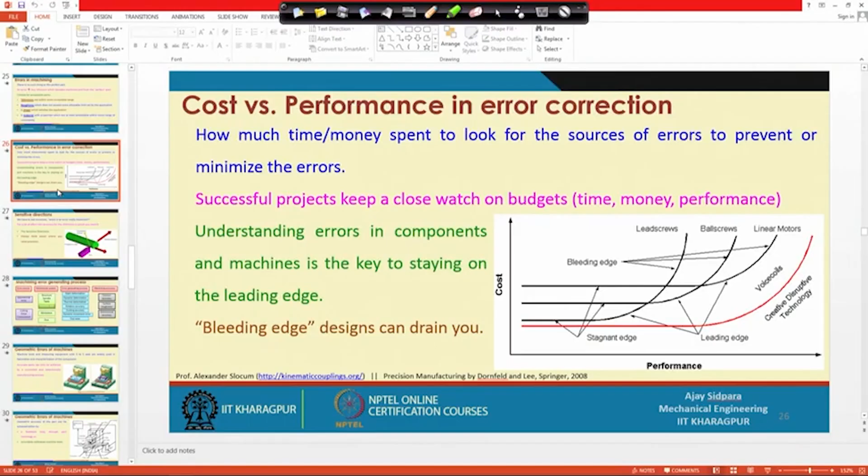Cost versus performance was one of the criteria. Here we have seen that you have to always stay at this leading edge, so that you can get more amount of performance compared to the cost and time you are spending to get the system more ready.

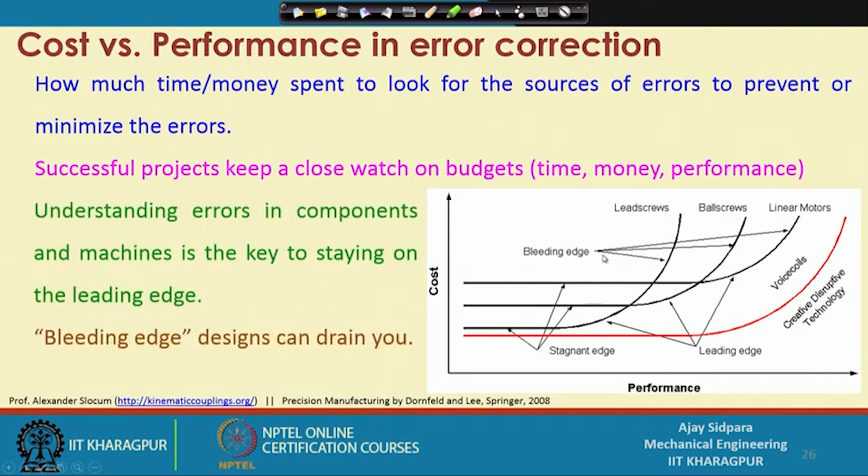Then we have seen that we have to focus not only on cost and time, but also finalize which direction or error is important to remove or minimize. There are many errors, but some can be neglected since they may not play an important role during or after fabrication. So you pay more attention to the sensitive direction where your machine stiffness should be very high.

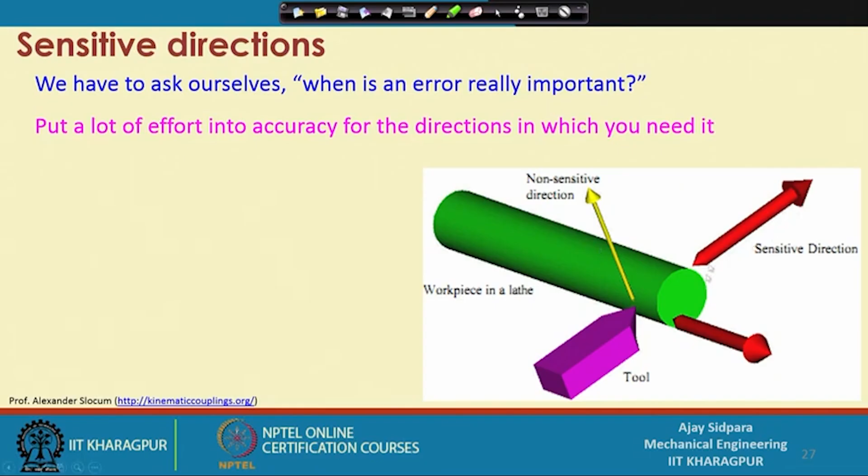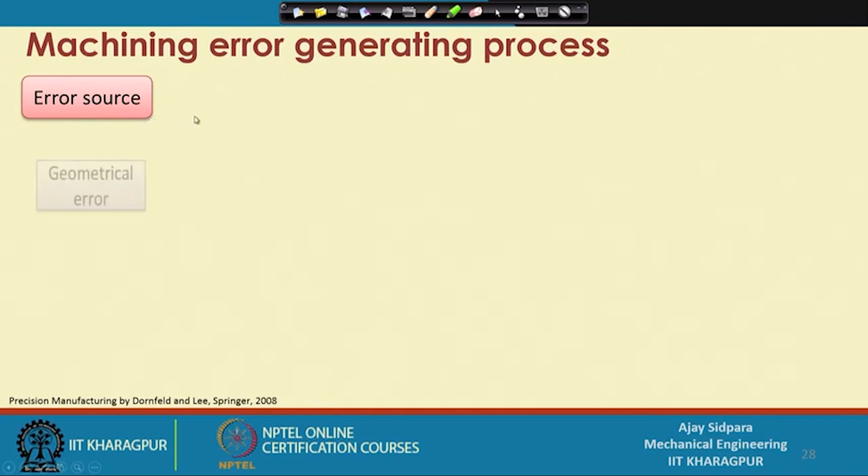Now, machining error generating processes. First we have to identify the sources of error. Mostly the sources of error are geometrical errors, cutting process error, drive error, and environmental error. What is the geometric error?

Geometric errors are mostly related to the structure of the machine, related to the machine tool. Cutting error occurs when you operate a machine, at that time you end up with some type of cutting operation, so your machine is in dynamic condition. There are forces, acceleration, deceleration of the cutting tool in different motions, and high heat generation. Those things create problems in error.

Then there are drives. Drives means the table and cutting tool which move up and down, moving the slides and other things. Environment is mostly related to temperature variation, humidity variation, and climate conditions. So these are the different sources of errors.

Now second is the mechanical system, how these errors are affected in this direction. Geometrical errors are mostly related to the machine, the machine tool. What does the machine tool consist of?

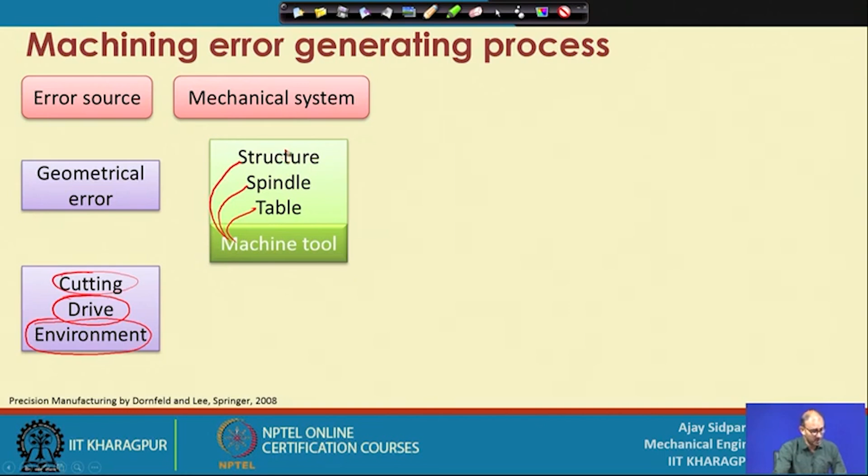Machine tool consists of the table, spindle, and the structure. Geometrical errors are mostly connected with these particular things, because the table and structure are always a stationary structure. So if you are not getting orthogonality between the x, y and z direction, then you end up with some type of problem.

So these are what is required in this particular direction - all things should be perpendicular to each other. If those things are not there, there are some other problems, and you end up with some geometrical errors. What are the other components here?

Another one is the workpiece, because we know that the machine tool is a standalone component, but there are two other things we are adding depending on the selection of machining operations. One is the workpiece, which we add because we want to shape this particular thing. And why are we shaping that?

We need a tool also, because the tool and workpiece are both selection based, depending on the specification of your machine tool, and these things are already built into the machine tool. So cutting tool error, cutting error, drive error, and environmental error are directly connected with this, and may be connected with this also.

So, these are the error sources. Where this error will occur, those things are these, because in the mechanical system these are the only things which are standard available. Now, if you add some camera or microscope or force sensor, those are supplementary things, but they cannot be considered during this particular error generation mechanism.

Then the error generating processes, what are these things? This is the static deformation, because in static deformation, if you are not doing any machining operation, because of the aging of the machine tool, there is static deformation in the structure and static deformation in the table also. In that way you end up with some type of problems.

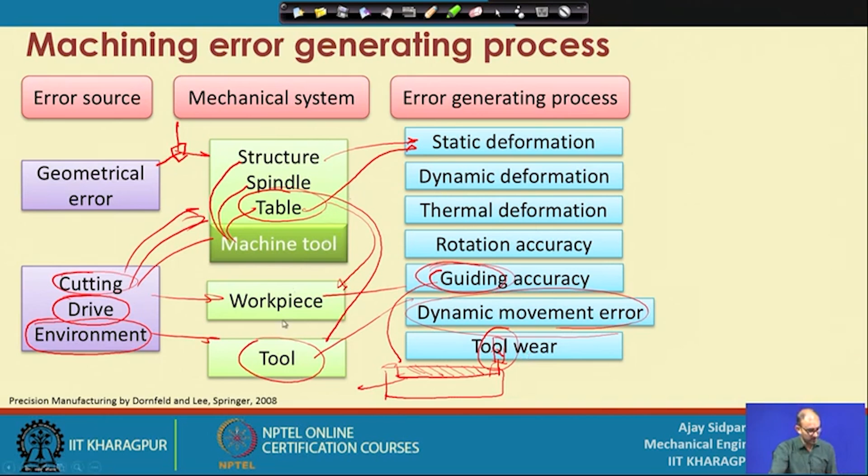So, in that way these are the different error generating processes, and what you are finally getting, what is our objective, is that we should get very high contour accuracy. Contour accuracy means, suppose you want a circular or cylindrical component - it should be a cylinder only, not some type of cone in the positive or negative way. That is called contour accuracy.

Surface roughness is important because we have different criteria for acceptance of the component, since we cannot produce a perfect part. Contour shape was one criterion, surface roughness was another, and dimensional accuracy, that is how much tolerance is within the part.

Here we are not talking about material properties, because that is another criteria not connected with the machine tool. So what we have to do first is find out what is the problem in our part.

Suppose surface roughness is not exactly meeting the requirement, but the contour is okay and dimensions are also acceptable. Then if you are getting poor surface roughness, you have to go back and find which parameter is affecting the surface roughness.

Suppose your tool is worn and you continue that machining operation, there is a chance that tool wear is one of the things creating a rough surface. Once it is identified as tool wear, go back again and find which mechanical system is creating the tool wear.

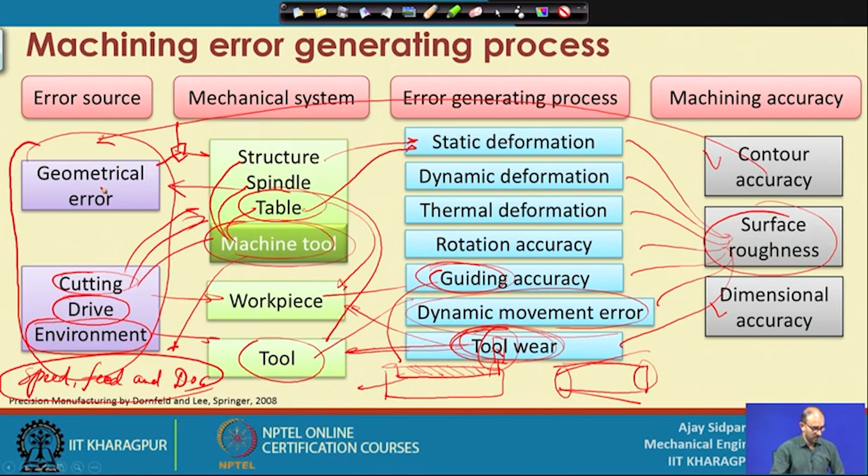An accurate part can only be achieved by a controlled or deterministic manufacturing process. Now what does it mean? The first thing is control. How can you control your thing?

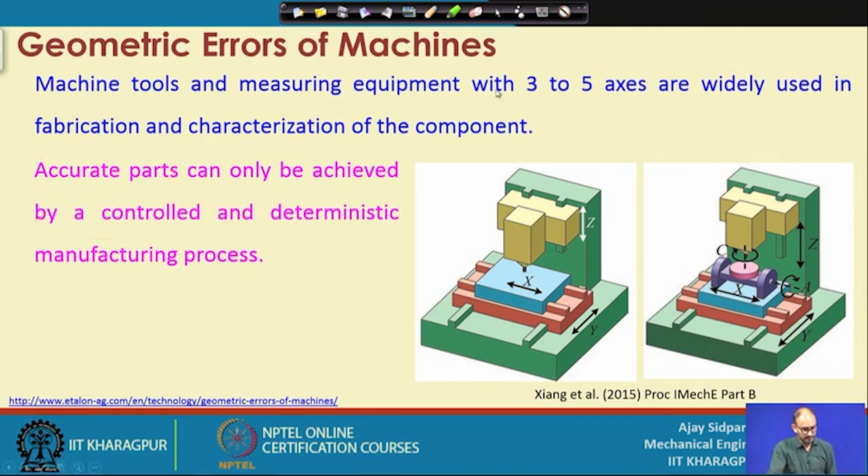Depending on that, different construction parts are also available. This is called the construction loop or structural loop through which you get this information. So if you have a very good feedback control, you can get a geometrically correct component, or alternatively you can get it through a calibrated machine tool.

Calibrated means, as we saw in the earlier slide, if you machine a component with a fixed parameter and continue with that fixed parameter, every time you get the same component, that means your machine is calibrated. You do not have much deviation that would reject the part, even if all input conditions remain constant.

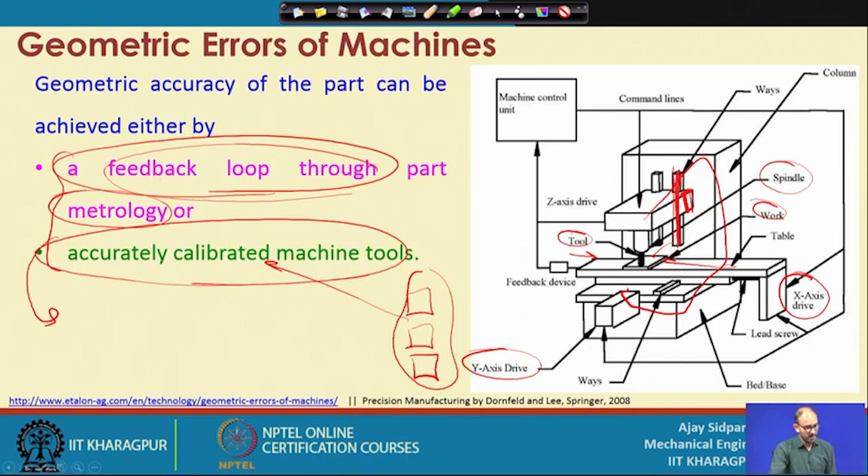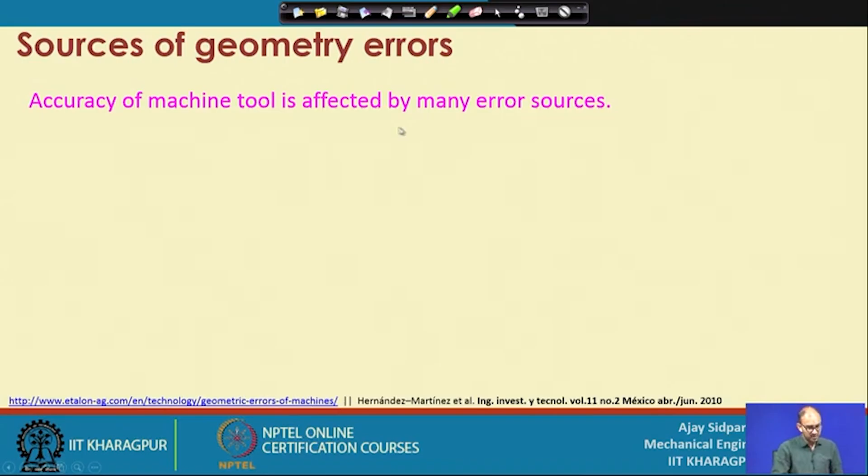Now, sources of geometry error. Let us first take the geometric error, meaning the sources of error in the X, Y, Z direction, or the movement of the axis only, not going into the tool side or workpiece side. So the accuracy of the machine tool is affected by many sources. If you see this particular thing, you can understand that this should be exactly a straight line.

If this is the straight line, this should be perpendicular to this part, and this should be perpendicular to this one, and this should be perpendicular to this one. So this should be the actual condition, but what happens is you have external vibration, distortion and foundation problems. So your base or foundation is slightly skewed, and because of this deformation of the foundation, even if all three of these are right angle to each other, this whole thing will move in the other direction, even if it contains a 90-degree part. So this is also 90 degree, this is 90 degree, this is 90 degree, but this particular line has moved from this to this at a particular angle. So the whole thing is distorted.

Now there is thermal fluctuation. If this particular thing is perfectly correct, this is a straight line, there is no problem in that, so the whole thing is correct. Now thermal deformation occurs here, so this will bend a little bit, and this whole thing will also expand depending on the temperature effect. So now this is completely distorted, and this is creating a problem. So now these things are not at right angles to each other, and that will create a problem.

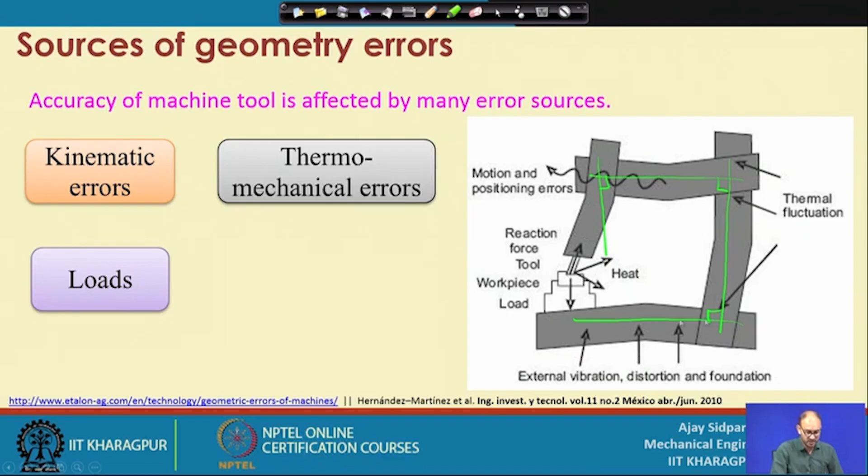Loads means there is also a stationary load. Another thing is that when you do machining, there is also a force, and that is also considered a dynamic load, which will create a problem in the spindle system as well as in other structural components. This load is the stationary load, and the dynamic force we are talking about is the reaction force or other forces that occur during machining operation. That means when your machine is in running condition, you will encounter these dynamic forces. So these are the different forces which create a problem in the geometry of the machine.

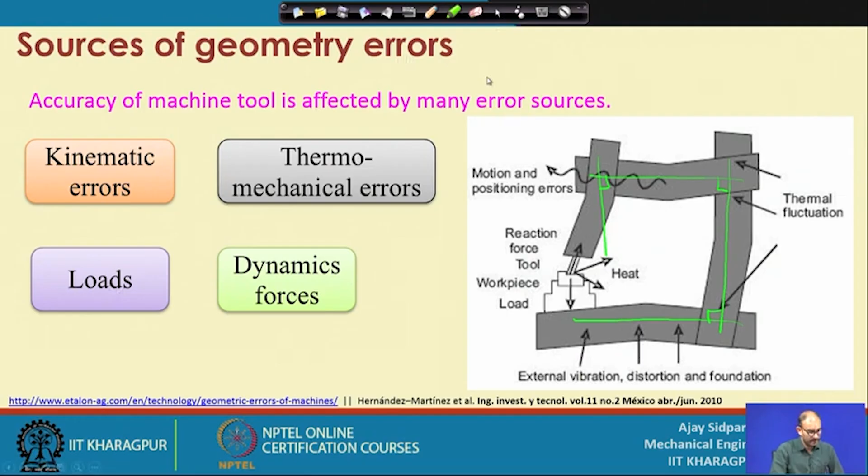So first is the kinematic error. What is kinematic error? It is due to imperfect geometry, alignment and dimension of the machine component. Suppose you have a complete structure of the machine, and if its geometry is imperfect, that means whatever dimension you are creating, suppose this cantilever beam has a square section or a circular section or any other shape, then its dimension should be perfectly within the allowance or tolerance limit.

Alignment is also a problem, because everything should be perfectly in alignment, so that your spindle axis is always in a vertical straight direction, not anything other than straight. And the dimension of the machine component directly depends on this alignment, because if the dimension is not exact, you will not get the assembly correct. And if there is an alignment problem, then you will not get the perfect combination of the different components.

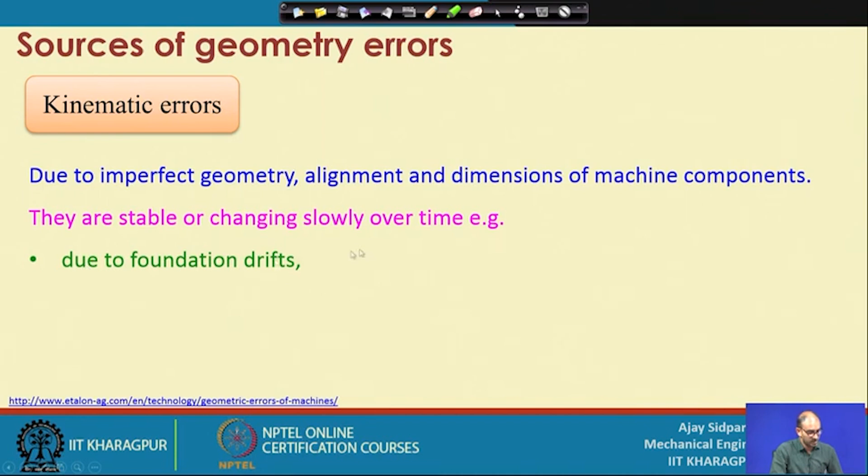So, they are stable or changing slowly over time. Whatever these kinematic errors are, sometimes initially you are not getting those things, but they are stable also. As time passes, you are doing machining with different parameter settings, sometimes the forces are also very high. Over time this will start playing an important role, because of the foundation drift.

What is the drift? Drift is a deviation due to age. That means whatever deformation occurs due to age, or we can say deformation with respect to time. If your machine is very old, then you will get a foundation drift.

Foundation drift means the foundation is never in motion, it is always a stationary part. But because of the many things you are doing on the foundation, machining, mounting a very heavy vise or heavy workpiece on top, then removing it and mounting again, those things play an important role in the study of the current status of the foundation.

And wear or material aging, because all the materials used in the construction of the machine tool may get wear because of aging. Aging means with respect to time you are getting these materials into a very unstable condition. So you may get some type of kinematic errors after a long time, and also by collision, because when you do machining at a very high rate.

Suppose your cutting tool is here and your workpiece is here at this location, and you want to remove this whole thing. You start with the cutting tool here, and then right now you are moving from here to here, there is no machining happening. So it is called free machining.

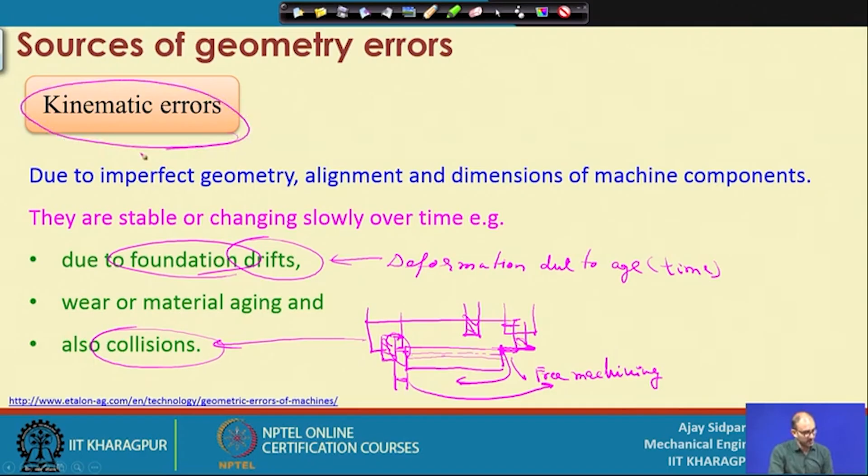Then thermomechanical errors. What are thermomechanical errors? The internal and external heat sources in the machine may lead to thermomechanical deformation of machine components, and then it leads to kinematic error, because we have seen the full construction here, in x, y and z direction. This is the workpiece, this is the tool.

This is the construction. Now because of this temperature difference, what will happen? This particular part has some coefficient alpha here, this one has one thermal coefficient alpha, this one also, and every component has a different thermal coefficient of thermal expansion.

If the materials are different, then all materials have different coefficients of thermal expansion, and depending on the temperature variation, your part will expand or contract differently. So at the end, at certain locations it will create a problem, because it may bend to the right side or the left side, and then your total geometric stability will be reduced.

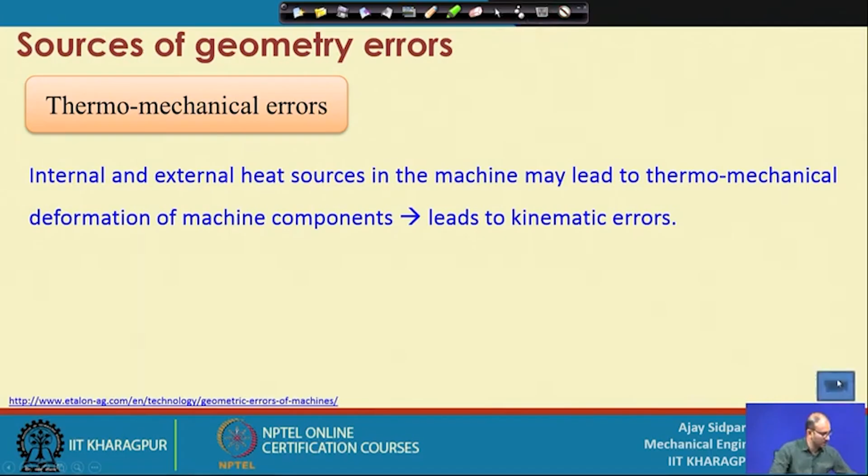Now let us see a video here, showing how this particular thing works.

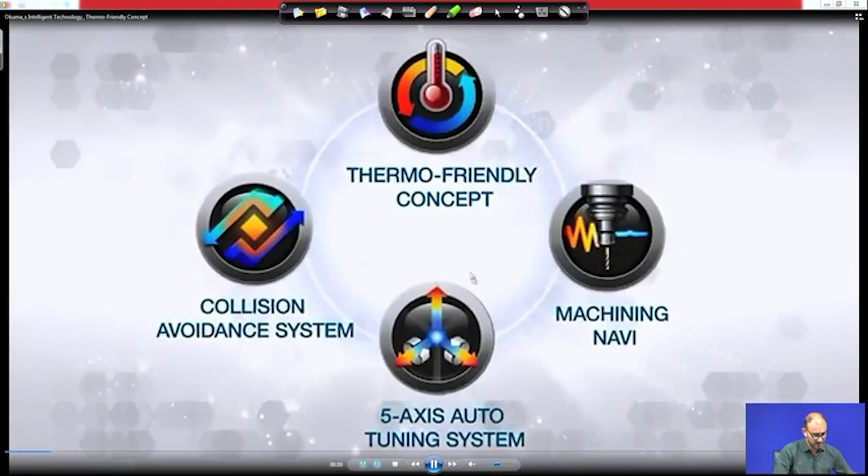So, this is the company Okuma. They are making this particular system for temperature Thermo-Friendly Concept, that is what we are looking at right now.

So what is this thing? You can actually control the deformation within a 0.1 micron control. So if your tool is deviating within a 0.1 micron, then you can actually control that part.

Intelligent machine construction - construction also plays an important role. If it is a symmetric structure, then the deformation will be symmetric, your tool will always be in the center. So temperature equalization is important because whatever the ambient temperature condition, your machine will respond to that temperature deformation.

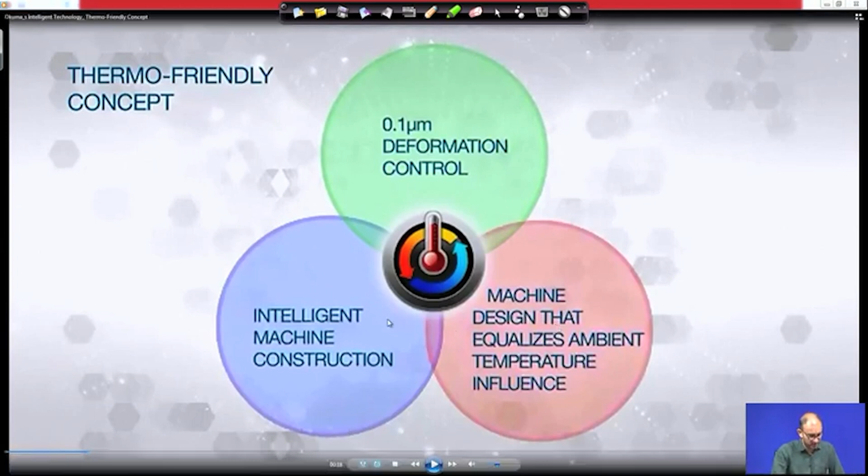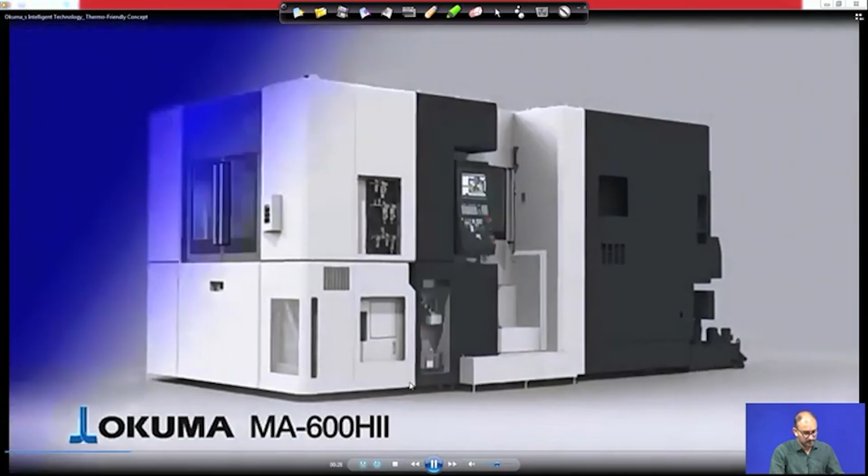So this is the first thing about how the machine will take care of this. This is the installation space of the machine, and this is the temperature variation. Now if you see this, the temperature of the whole machine is within a particular zone.

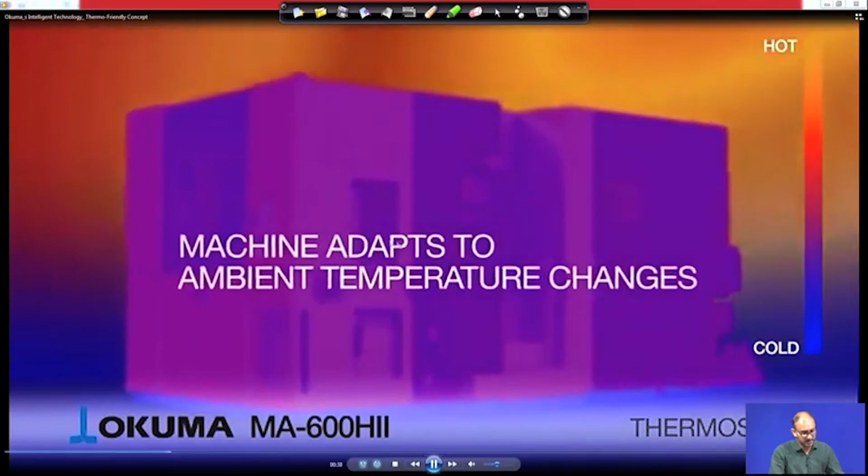If there is, you will not find any orange spot or red spot. So this is the external. When you are changing the temperature of the climate, still your machine is at the same temperature. The machine adapts to the ambient temperature changes. Intelligent machine construction - how you construct your machine is important here.

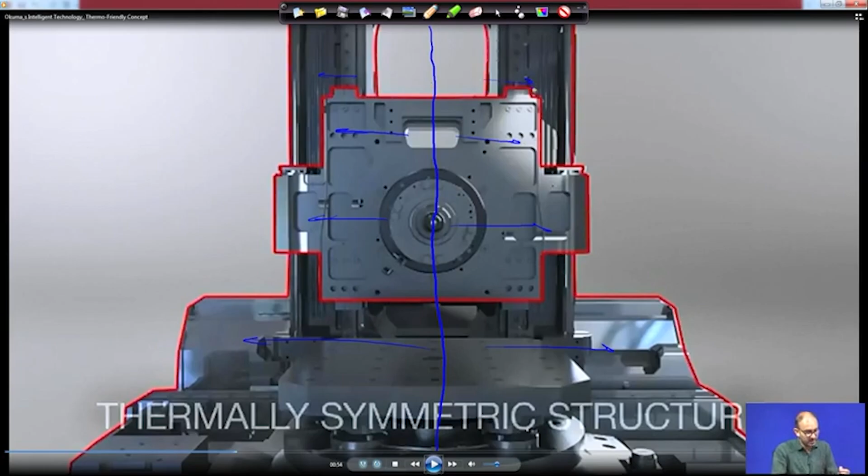If you see this, draw one particular line from here - both things are symmetric in this case. What is the advantage? Even if there is thermal deformation or thermal expansion, this will expand in all directions. So whatever is the location of this particular spindle, it will not be changed. That is the advantage of a thermal symmetric structure.

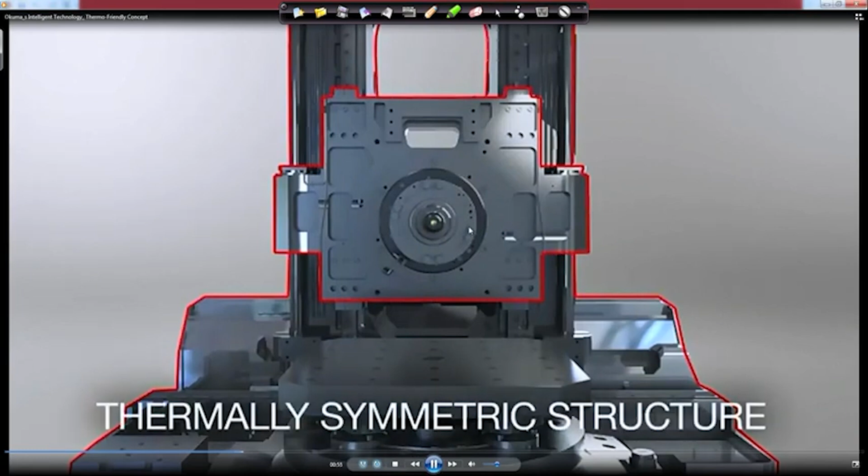So these ribs are important. Now see, the temperature is moving up here, but still you are in the same direction - thermally symmetric structure.

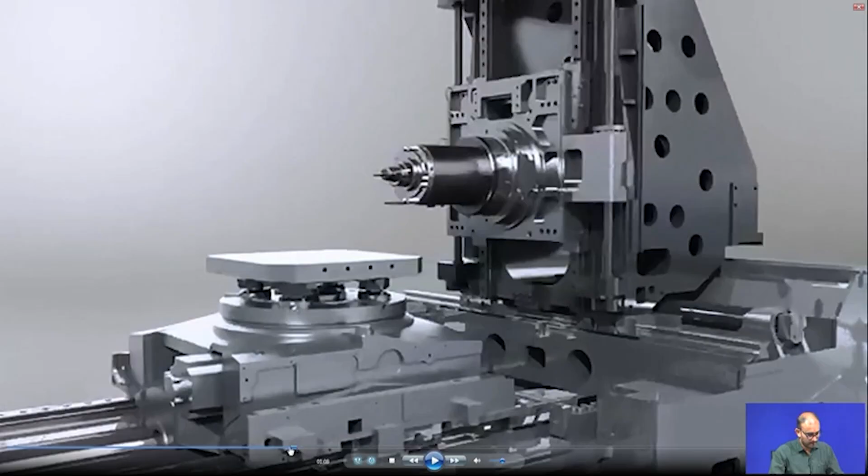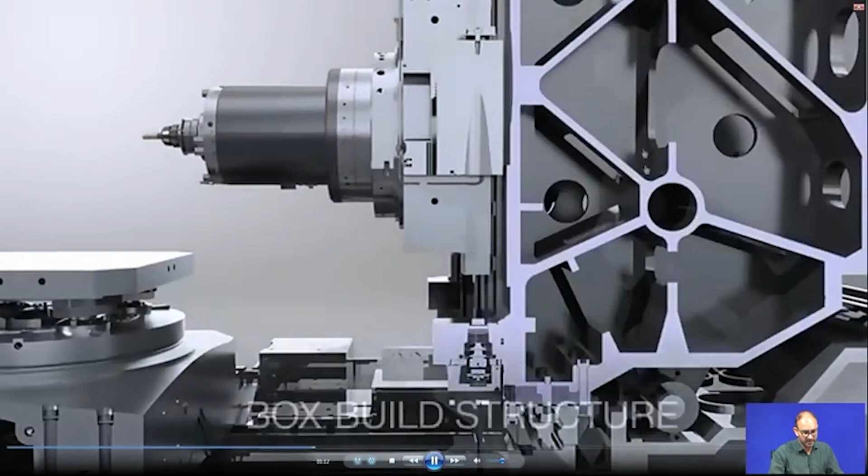And this is the box build structure, so this whole thing is not a solid structure. If you see the cross section, you will find a lot of ribs. This will help in dissipation of the temperature, because the area increases here, and that is the reason you can actually do a predictable deformation here - whatever deformation you can predict.

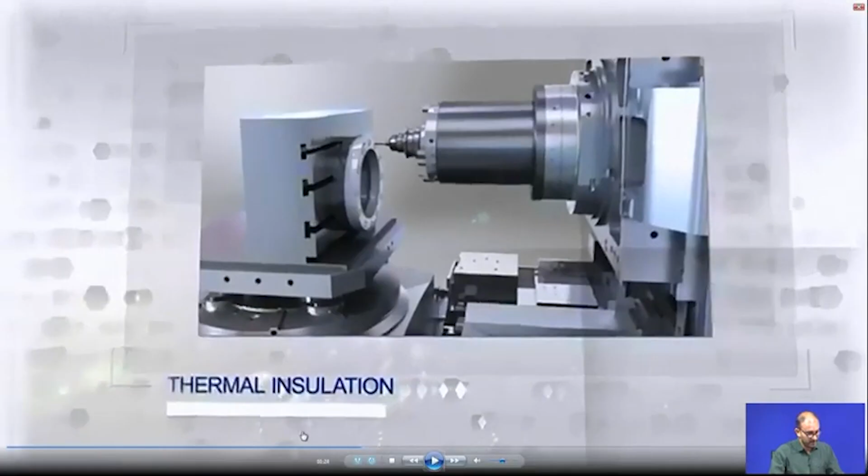And this is thermal insulation. What is the importance of thermal insulation? When you are doing machining, there is heat generation, and some heat will go to...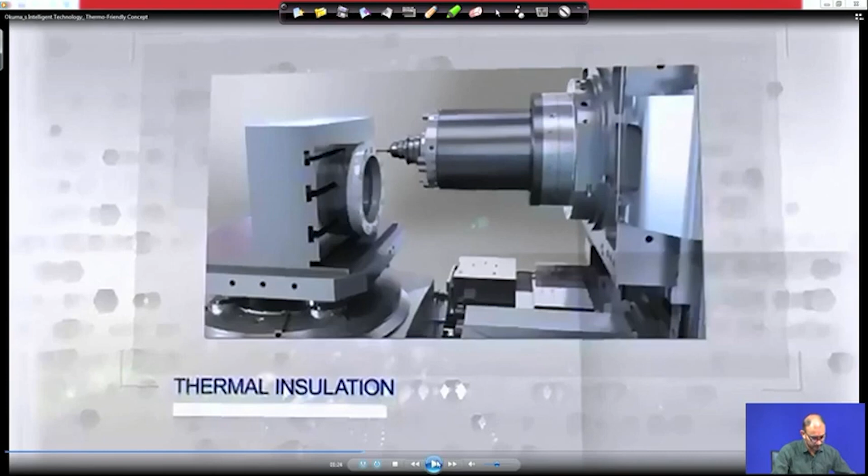So this is the chip which is falling here at this location, and this is the temperature zone, a high temperature zone, so you end up with this temperature. What do you have to do? You have to provide insulation here, so the chip will not create any problem with heating in the different components of the machine tool.

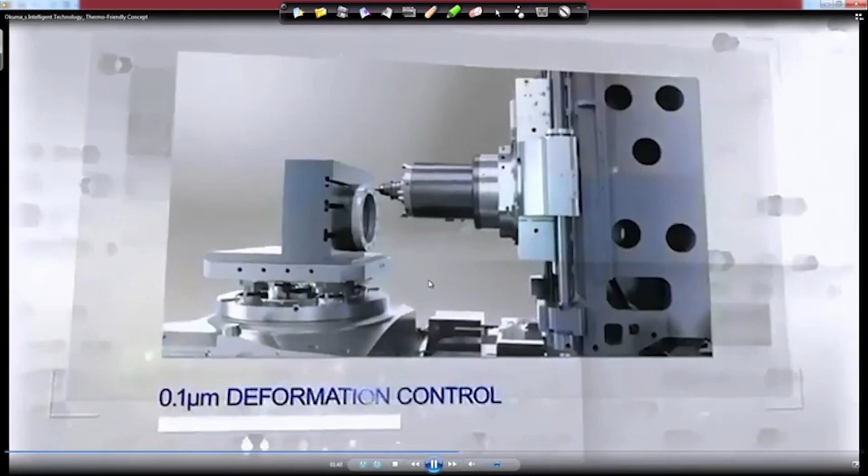And then this is the last one, this is the 0.1 micron deformation control. Here what you need are sensors which will sense the temperature variation.

So right now this is your target position, but it is in ambient temperature. Now suppose you have a variation in the temperature, and because of that, your target is shifted slightly - up to 0.1 micron, that is called 100 nanometers.

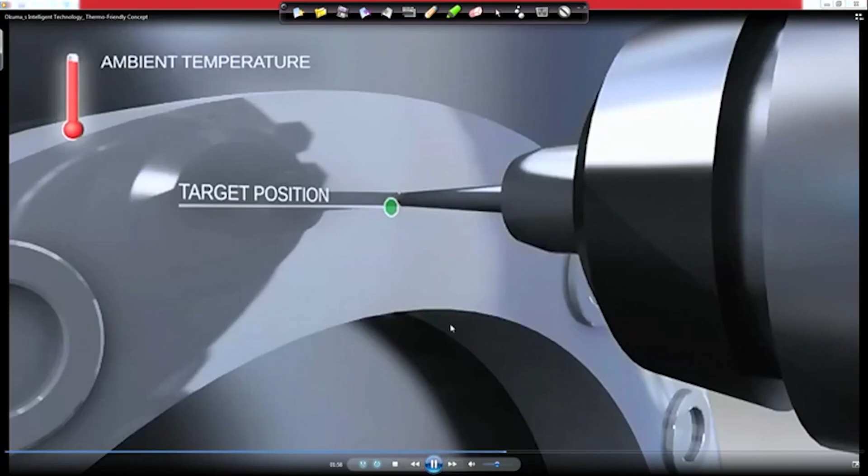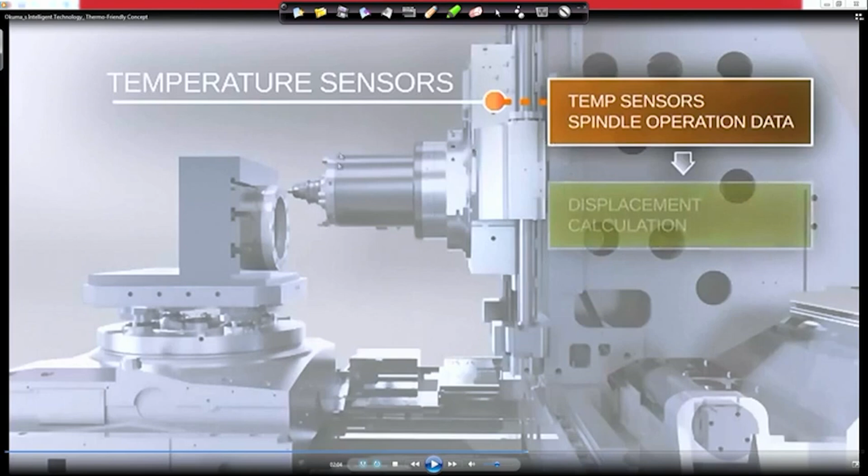So what this machine does is it has a temperature sensor here, which will find the temperature sensor spindle operation data. It will calculate the displacement here, how much displacement is due to the temperature variation. That displacement will directly generate a compensation signal, which goes to the axis control. Once you get this, it will recalculate the original location, and then you can do the machining.

So there are a lot of advantages of doing this, because you can actually reduce the total variable time. Without this thermo-friendly concept, you have to measure temperature throughout the operation. Here you do the first measurement, then it takes care of everything - you only have to do one thing here.